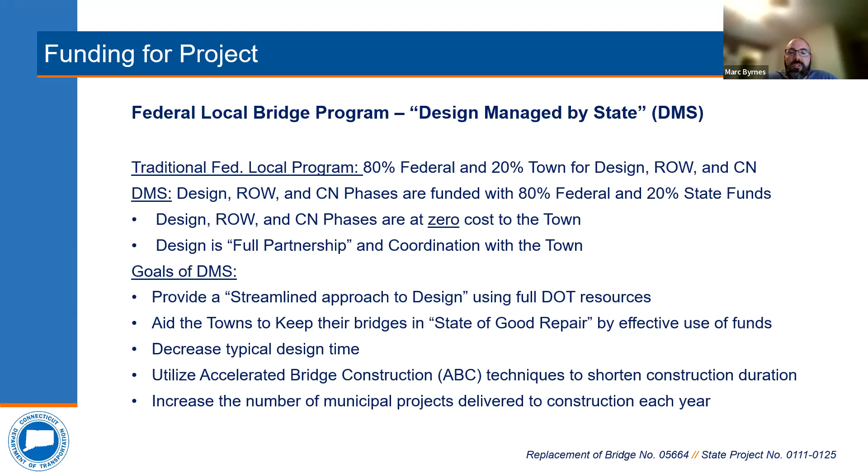I will now turn it over to Maureen Nicholson, First Selectman for the Town of Pomfret. Maureen?

There we go, I remembered to unmute myself. I want to welcome everyone that took the time to join us this evening. I think you'll enjoy this presentation. I thoroughly did when I heard it last, and I learned a lot, and I hope you will too. And please don't hesitate to ask any questions you might have.

Thank you, Maureen. I will now introduce the project team. Our division chief of bridges is Bart Sweeney.

Our principal engineer of the consultant liaison group is Derek Lassard. As I said, I'm Marc Byrnes, project manager. Andrew Shields is project engineer, who is on vacation this evening, so he couldn't be here. From the Office of Rights of Way, project coordinator Zachary Garino, and then Kathleen Erickson, who's an assistant project coordinator. And then from our consultant liaison engineering firm, CHA, is Anand Sasadri, project manager, and Rachelle Clark, project engineer.

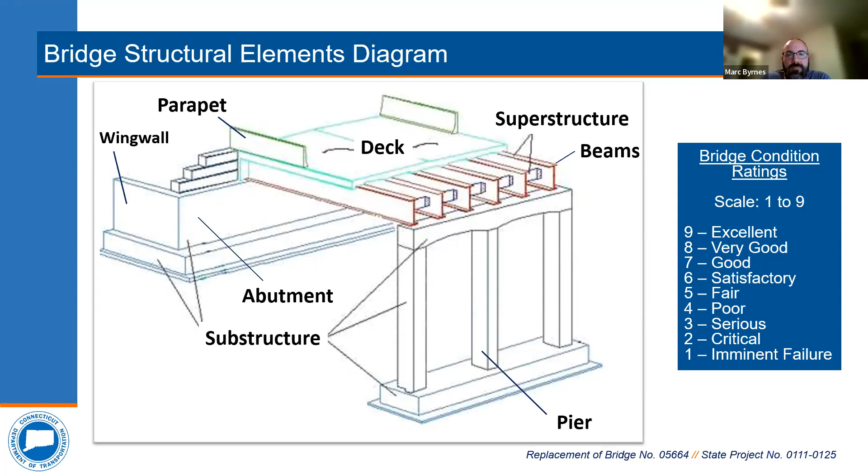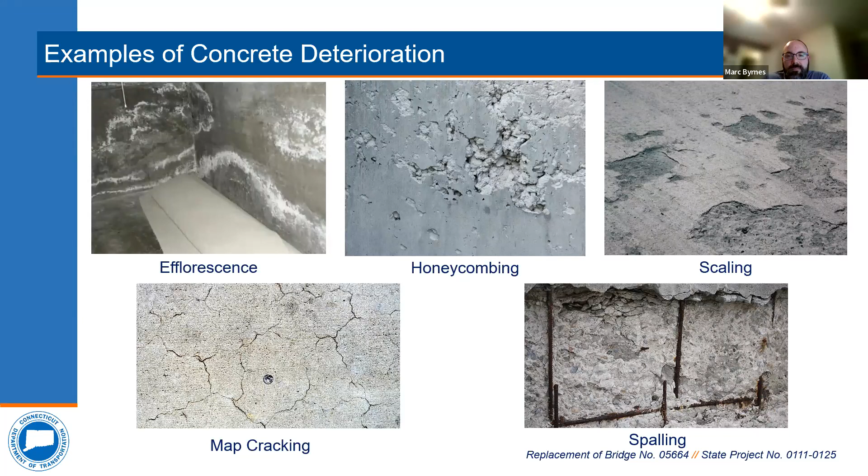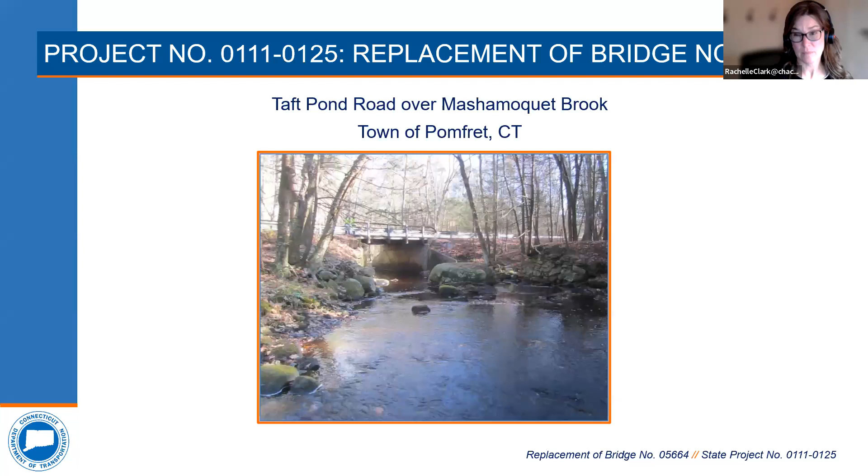Good evening, everyone. In tonight's presentation, we are specifically discussing bridge number 5664, which is Taft Pond Road over Mashamoquet Brook in Pomfret.

In this aerial view of Taft Pond Road, north is oriented to the top of the page, and our bridge is located here in the middle of the photo. Taft Pond Road runs north and south and has several bridge crossings, not just over the Mashamoquet Brook. This particular bridge is at the southern end of Taft Pond Road and is the one closest to Route 97, which you might also know as Hampton Road. In this area, the Mashamoquet Brook runs from west to east below the bridge.

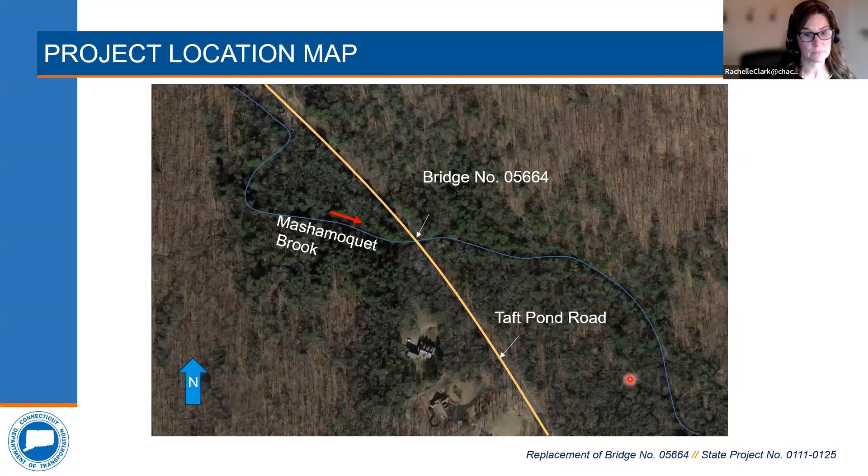This is a photograph of Taft Pond Road looking toward the south. It's a 2-lane road that is 22 feet wide, and it sees a small amount of vehicular use, with about 168 cars crossing the bridge each day. The speed limit on the road, which is also the speed it's designed for, is 35 miles per hour. Cars do move quickly through this area.

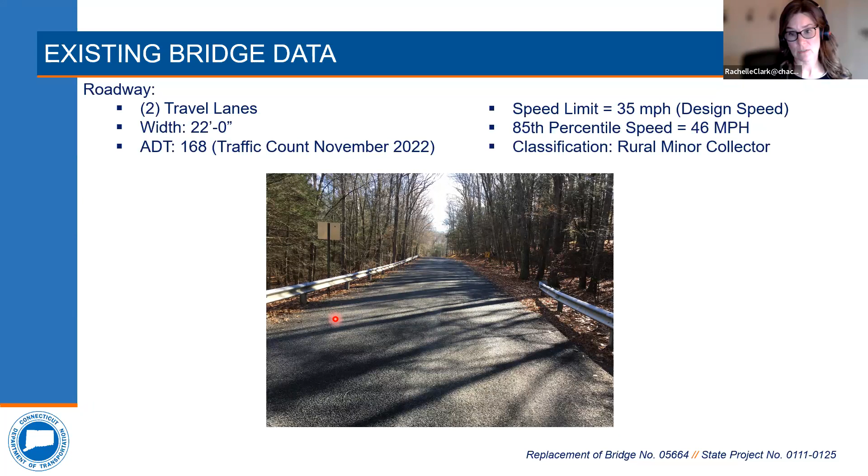Our traffic counts show that the 85th percentile for speed is 46 miles per hour. This means that about 85% of the cars traveling across the bridge are going 46 miles per hour or slower. The classification of the road affects certain design criteria that highway engineers must use, and this road is classified as a rural minor collector.

The existing bridge was constructed in 1900, making it over 120 years old. It was rehabilitated in 1996 and then again in 2021. It's a single span bridge, meaning it doesn't have any intermediate piers, and it spans from abutment to abutment. The length of that span is 22 feet.

When we talk about the span of the bridge, we're often referring to the structural span, which goes from approximately the middle of one abutment to the middle of the other abutment.

The bridge's superstructure has bituminous pavement supported on corrugated metal deck. This is a little different than typical bridges, which tend to have concrete deck instead of steel deck. That steel deck is supported by steel beams that span from abutment to abutment. The substructure has concrete abutments and concrete wing walls.

These elements are supported on concrete footings that bear on soil below the foundation. In this photograph, the footings are actually covered up by water, so you can't see them.

The bridge currently has weight restrictions. It is posted for 3 tons, and commercial trucks are prohibited from using the bridge.

The Mashamoquet Brook flows from below the bridge through a 20.2 foot clear span. So the clear span is slightly different than the structural span, and it's the distance measured from the face of one abutment to the face of the other abutment.

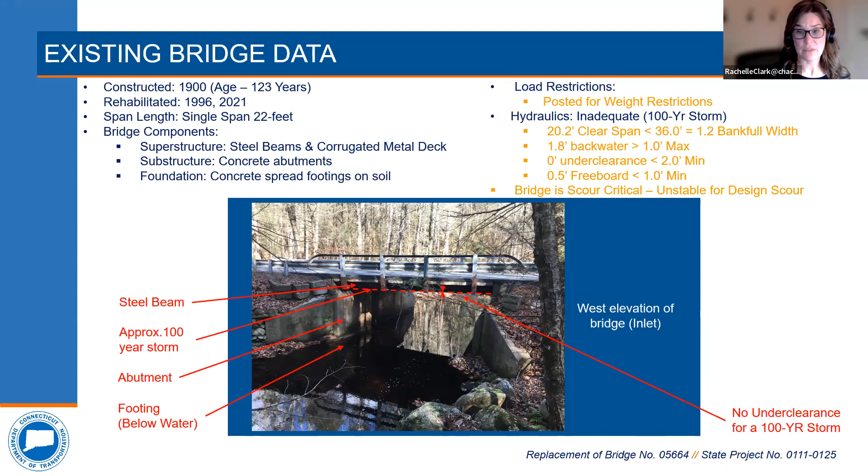Mark explained condition ratings earlier, and we can run through those now. As a reminder, the scale runs from 1 to 9, and the higher the number, the better the condition of the bridge element. As mentioned before, the bridge was rehabilitated in 2021, so several of the ratings are high.

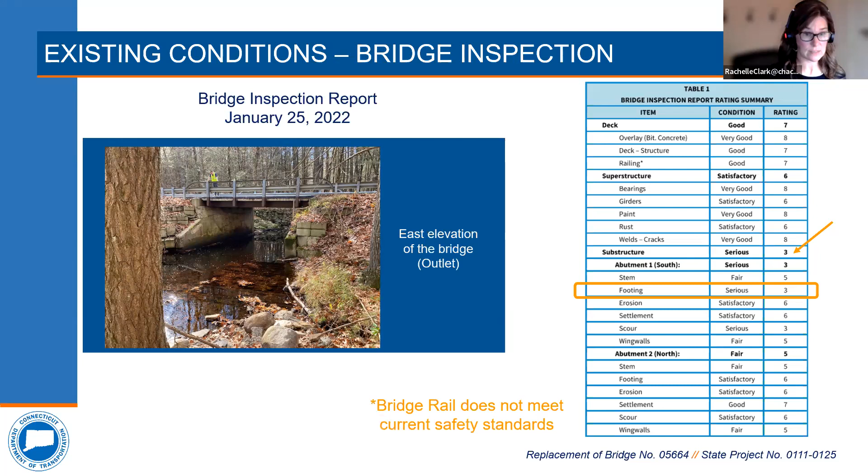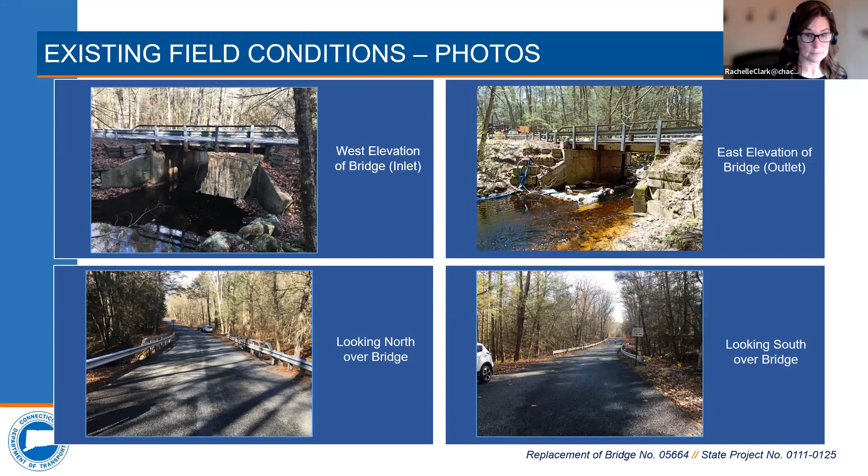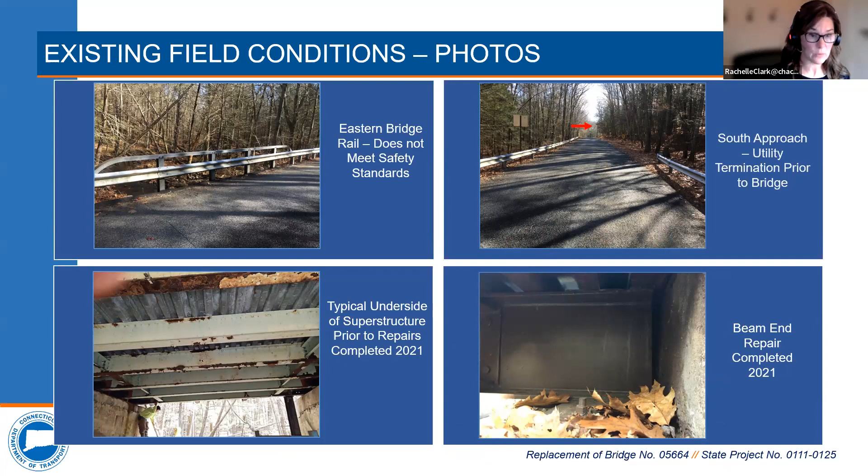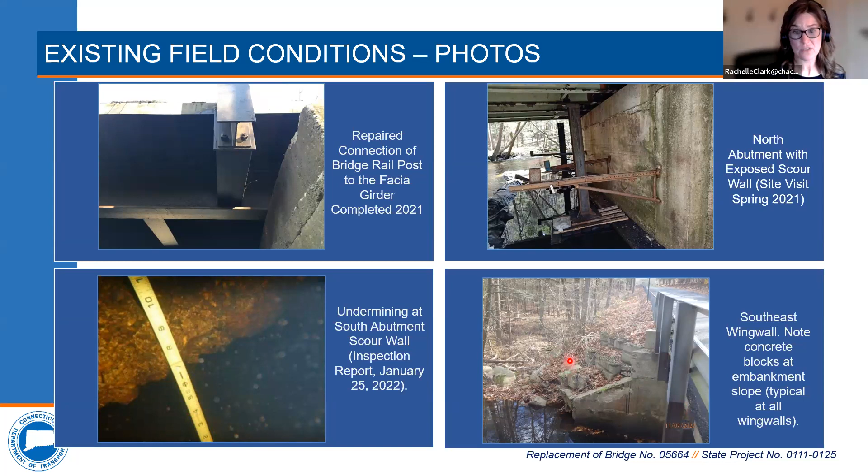The bottom right photo shows additional concrete blocks visible in the embankment slope. Those were added to help protect the slope and keep the soil in this area from washing away.

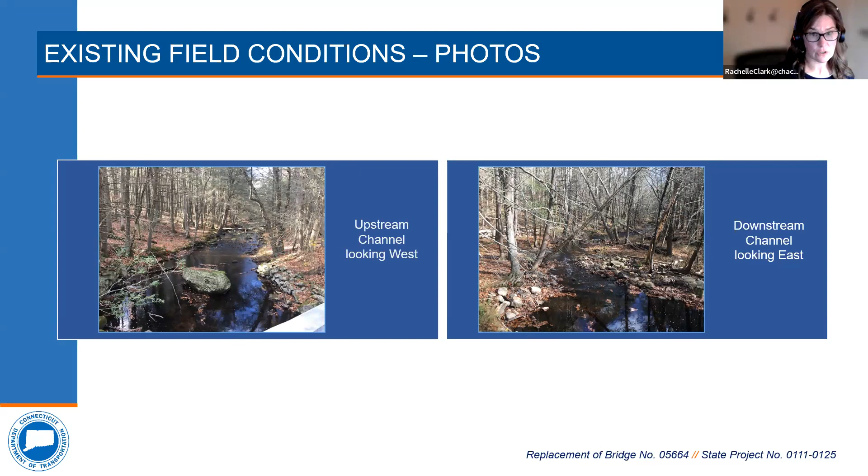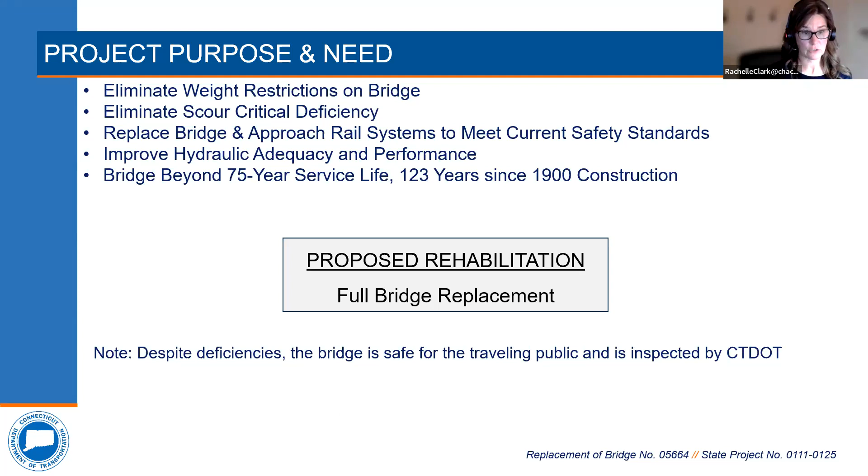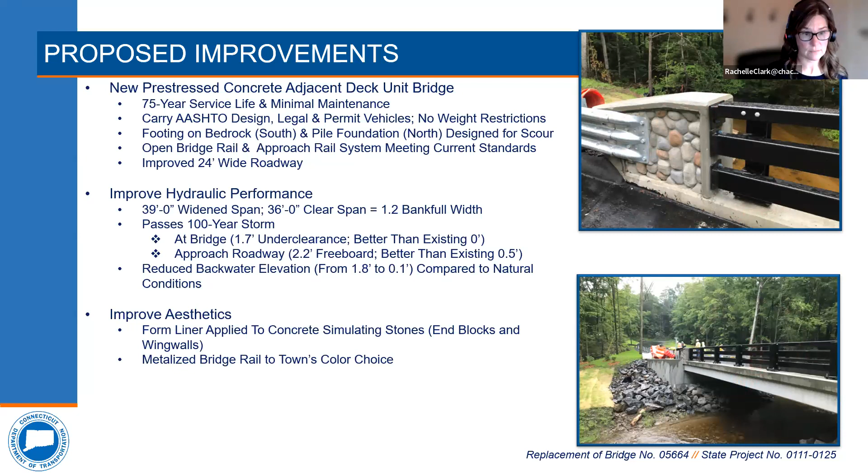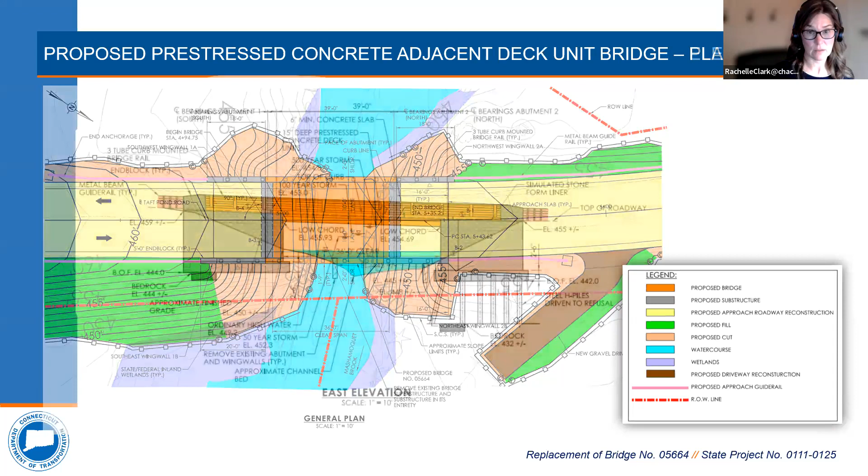This next slide shows an elevation view of the bridge. From the east, the bridge superstructure is highlighted in orange and the substructure is highlighted in gray. The thing to note about this elevation is where the 100-year stormwater elevation lands. So you can see it's up here,

Providing that 1.7 feet minimum clearance below the bridge.

The second thing to note is the support of the foundations. As mentioned before, our bedrock on the south side of the bridge is significantly higher, so we have that footing shown directly on bedrock. At the north abutment, where the bedrock is lower, we have piles that extend from the top of the pile cap down to bedrock.

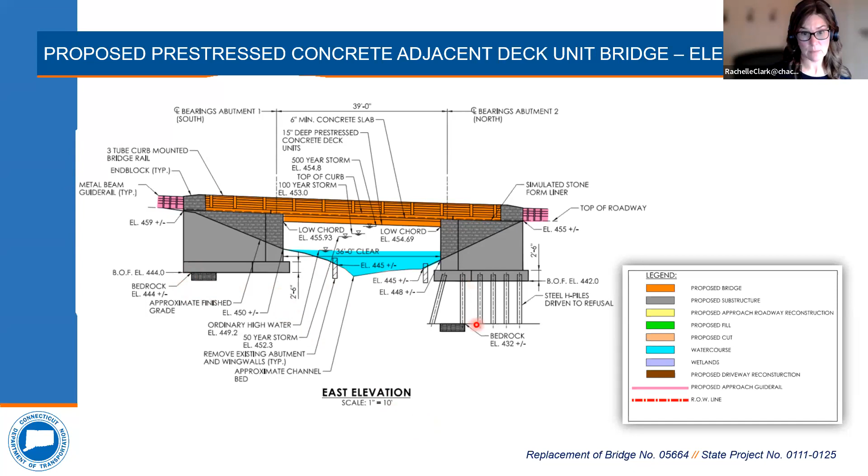This is a cross-section of the bridge. The things to note are that the roadway is 24 feet wide from curb to curb and is comprised of 2 10-foot lanes and 2 2-foot shoulders.

The open bridge rail will sit on a concrete curb, and the roadway will be comprised of 3 inches of bituminous concrete over a waterproofing membrane that in turn sits on top of a minimum 6-inch concrete deck. That concrete deck is then supported by our adjacent deck unit bridges.

These circles, if you're curious about that, in our adjacent deck units are actually voids that help reduce the weight of the structure.

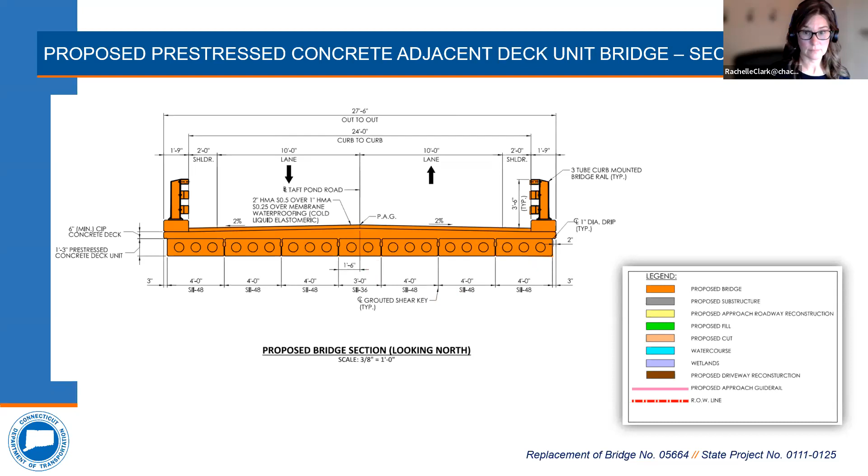This slide shows the roadway plan. Similar to our bridge plan, north is to the right. The length of our project site is about 500 feet: about 270 feet to the south and 230 feet to the north. The other thing about this plan is that it shows we are essentially maintaining the alignment of the roadway. It's not shifting to the east or to the west by any significant amount.

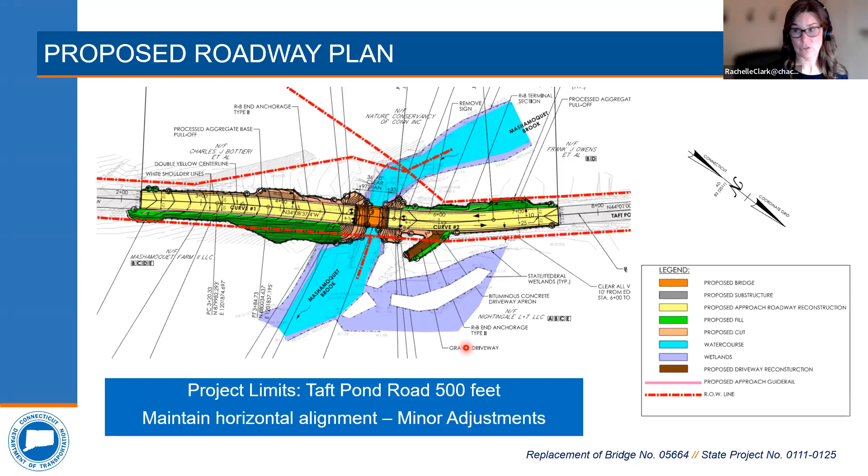This is the roadway profile plan. The scaling of the drawing is exaggerated, but there are two important things. First, it shows that the 100-year storm passes below those new beams. Second, similar to our horizontal alignment, our vertical alignment is not really changing either, so we're not raising the road or dropping it any lower.

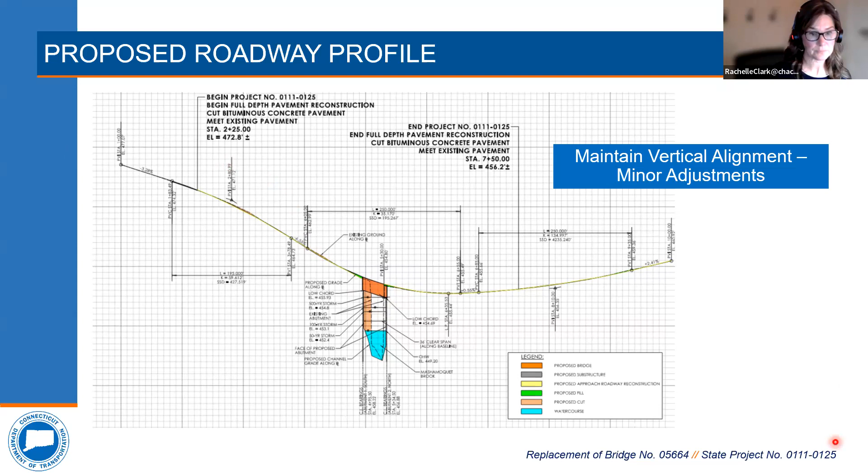During construction of the new bridge, traffic will be detoured around the project site. There is a primary detour route to the east, shown in red, and a secondary detour route to the west. The detour to the east uses Hampton Road, Ye Old Windham Road, Deerfield Road, and Brayman Hollow Road. The detour to the west uses Hampton Road, Pomfret Road, Eastford Road, and Boston Turnpike.

A detour was determined to be the best way to handle traffic during construction. When the road is fully closed, it allows for faster construction. Temporary bridges are sometimes used, but this has significant environmental impacts, so that option was ruled out.

This bridge is also fairly narrow at 22 feet wide, which makes staged construction—building one lane at a time and then switching over to build a second lane later—not really feasible. If this were a wider existing structure, that might have been a more feasible option. But for this project, the plan is to use a detour to construct the bridge.

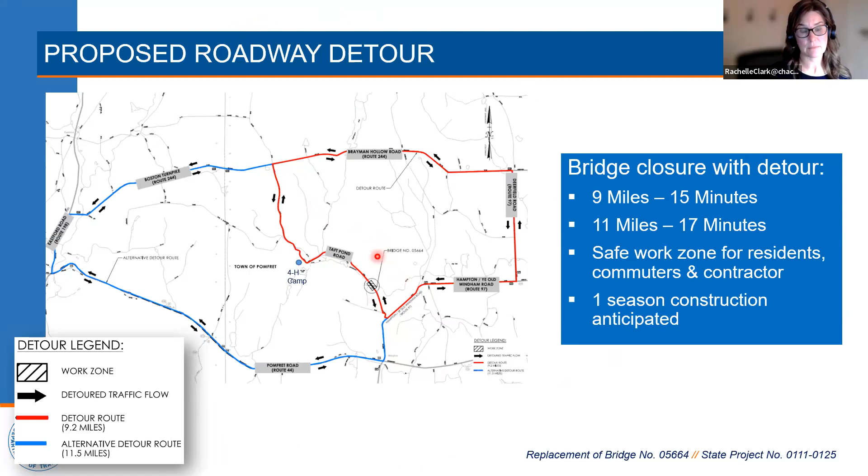There are no utilities on the project site. As pointed out in the photo before, the overhead utility line stops south of the bridge.

In terms of environmental impacts, those will include tree clearing. The work of installing the new bridge will also have both temporary and permanent impacts on the wetlands adjacent to the river and to the river itself.

The permits expected for this project include the Town of Pomfret Inland Wetland Permit, a Connecticut DEEP Flood Management Certification for municipalities, and a U.S. Army Corps of Engineers self-verification form.

The property impacts of this project will not include any permanent property takes. There will need to be easements in order to do some of the grading. Those impacts are primarily to the south of the bridge.

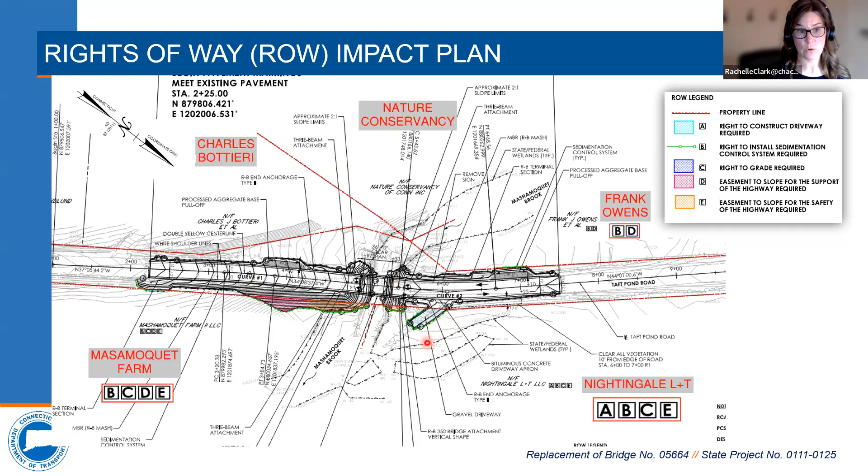Again, orienting you to this slide, north is to the right. So those impacts will primarily be to the south of the bridge, although there are some additional impacts to the north of the bridge. Both of these are mostly on the east side. We'll also be looking to get rights in order to install sedimentation and erosion control, and potentially to reconstruct the driveway that is currently east of the bridge.

At this time, I'm going to turn things over to Kathleen, who is going to talk a little bit about the role of the Division of Rights of Way on this project.

Thanks, Rachelle. My name is Kathleen Erickson, and I'm an Assistant Project Coordinator with the Department's Division of Rights of Way. Our office is responsible for acquiring the property rights needed for transportation projects. As mentioned, this project will require the acquisition of property rights, so I'd like to give you a brief overview of our acquisition process.

Before going further, I want to mention that the specific property impacts for this project are still being finalized and may change as the design progresses. Also, any required property rights will be acquired in accordance with Connecticut General Statutes 13A-73 and 13A-98E, as well as the Uniform Act. Let me go to the next slide.

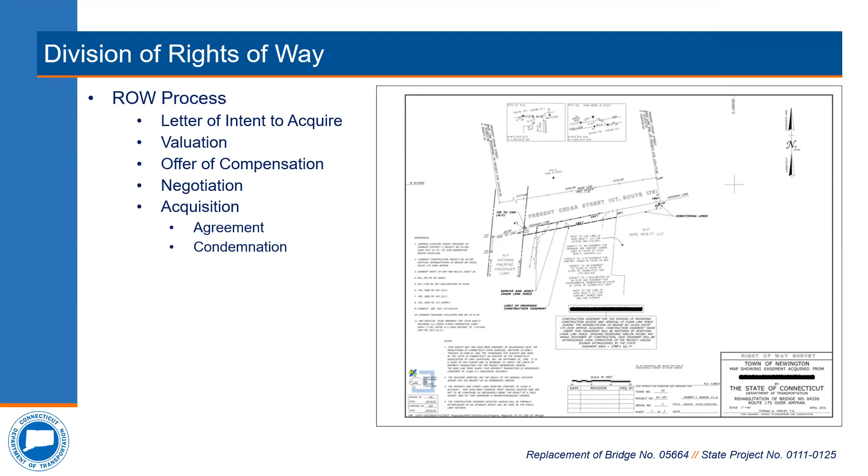Our construction cost at this time is estimated to be $2.45 million. That money will come from 80% federal funds and 20% state funds. So this project has no cost to the town. Please note that the cost and the schedule are preliminary and are subject to change as the design progresses.